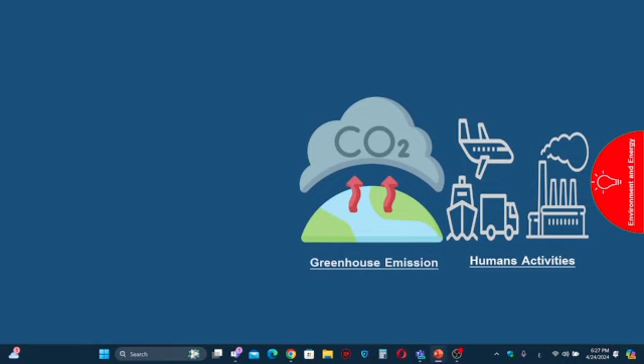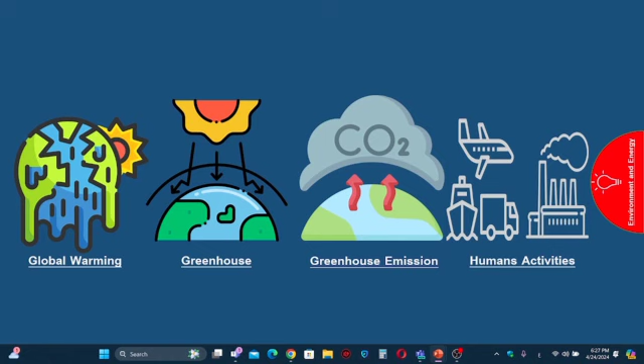This slide shows how the human pursuit of energy has a negative impact on the environment. As shown, human activities like transportation, industries, and power plants emit from their exhaust carbon dioxide, which is the dominant gas causing global warming. We have a group of gases causing global warming called greenhouse gases. The 2 most dominant of these gases are carbon dioxide, CO2, and methane. So, if we want to reduce the effect of global warming, we should control the amounts of emissions of carbon dioxide and methane.

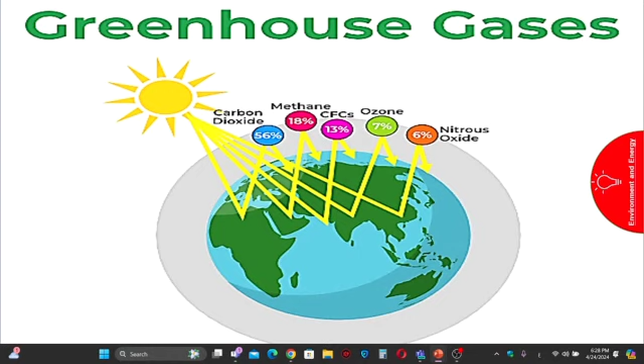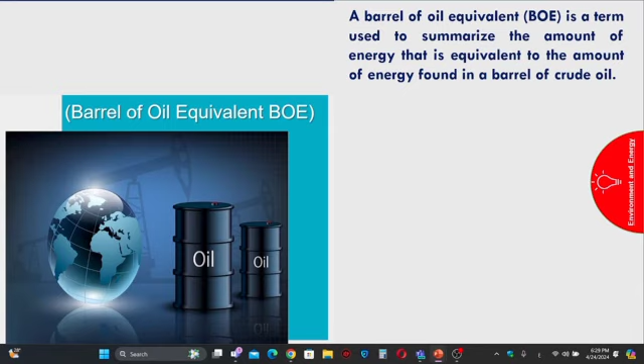The power system in general consists of 3 sectors: generation of power, transmission of power, and finally distribution of power. Fortunately, in the transmission and distribution sectors, there are no emissions. The problem is with the generation sector. This leads me to explain the term BOE. BOE is barrel of oil equivalent, a term used to summarize the amount of energy that is equivalent to the amount of energy found in a barrel of crude oil. It is an American unit of measurement, equal to 159.98 liters, or 42 gallons.

If I decide to burn 1 BOE, how much energy will I get? 1 BOE equals 1628.2 kilowatt hours of energy. Now, the amount of CO2 emissions per kilowatt hour. If I use coal, for 1 kilowatt hour I will get 1 kilogram of CO2. If I use oil, we will have 800 grams of CO2 per kilowatt hour. If I use natural gas, I will get 500 grams of CO2 emissions per kilowatt hour. And if I change my power plants from traditional power plants to combined cycle natural gas power plants, I will get 440 grams CO2 per kilowatt hour.

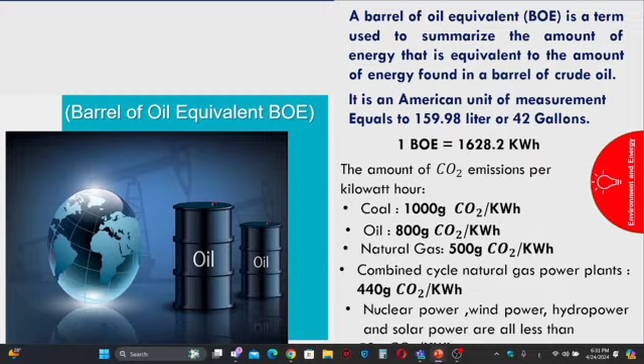Now, how to reach net zero emissions? The ways to reach net zero emissions are by applying the following. Number one, make our buildings sustainable by controlling the amount of light and air entering our buildings and the insulation of walls. This will impact the amount of energy we need during the different seasons of the year. It's like a chain. Low consumption of energy will mean less operation of power plants to generate the power. As a result, less emissions.

Number two, to reach the net zero emission, using thermal solar and photovoltaic panels. By using thermal solar heaters, we will save a huge amount of energy that we would consume by electrical heaters for heating the water.

As we mentioned above, the issue is like a chain. Low consumption of energy, less operation of power plants, as a result, less amount of emissions. Also, using the photovoltaic panels will supply the homes and buildings with electrical power. So this will affect the amount that we will consume from the national grid.

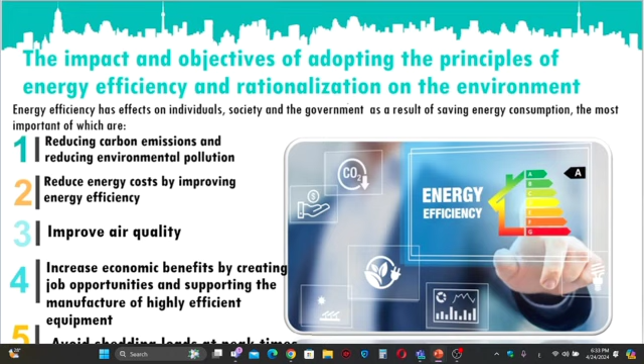Number two, reduce energy costs by improving energy efficiency. Number three, improve air quality. Number four, increase economic benefits by creating job opportunities and supporting the manufacture of highly efficient equipment. Number five, avoid shedding loads at peak times.

Also, to reach the net zero emission, I will use renewable sources like green hydrogen and micro hydro power. Hydrogen is the most abundant chemical structure in the universe, but unfortunately, it is not alone, but rather combined with other elements, like with oxygen in water, H2O, and with carbon in methane. For that, the process of getting hydrogen is complicated and expensive.

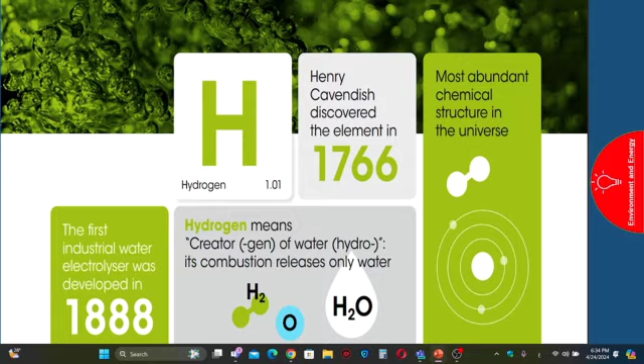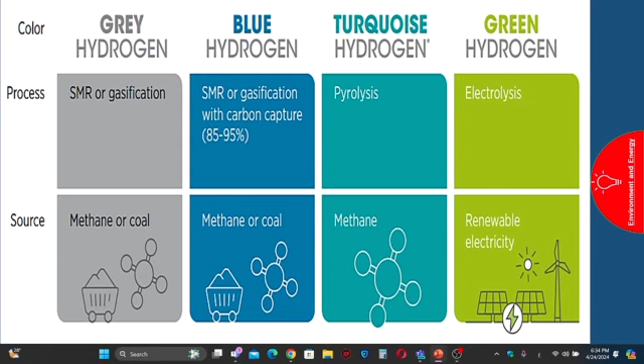Hydrogen is classified into several colors depending on the method of separation and the amount of emission during the separation. As you can see, we have gray hydrogen, blue hydrogen, turquoise hydrogen and green hydrogen.

The point is, when I try to separate the hydrogen from another element, I will get some emissions of CO2. So if these emissions escape to the atmosphere, I have gray. If I have carbon capture, it will be blue. And if I use pyrolysis and I have carbon in solid state, I will have turquoise. What is important for me is the green hydrogen.

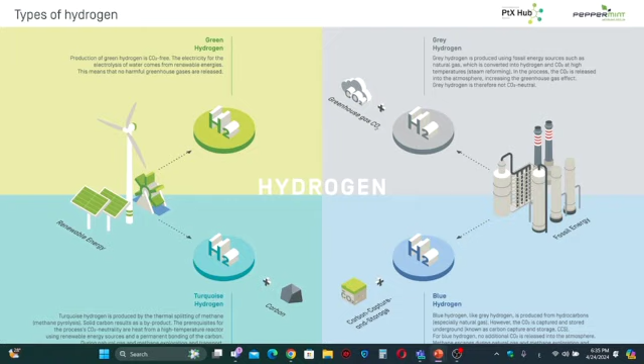Production of green hydrogen is CO2 free. There is no CO2 emission. The electricity for the electrolysis of water comes from renewable energies. This means no harmful greenhouse gases are released. For that, it's called green hydrogen.

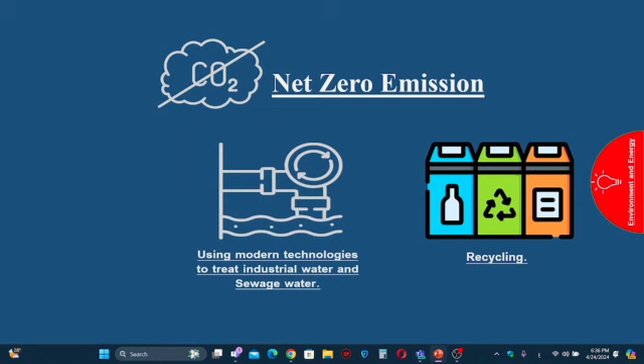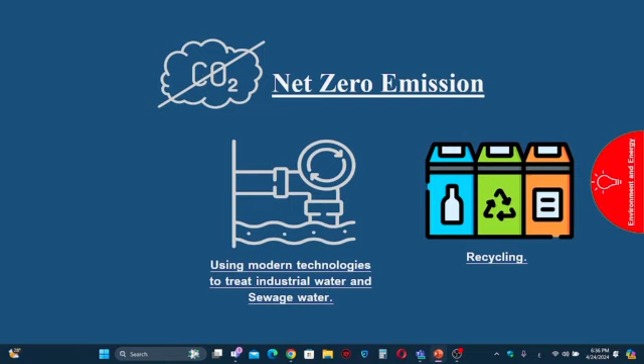Also, to reach the net zero emissions, we should apply recycling on our wastes. So we have a glass bin, organic bin, paper bin, etc. Also using modern technologies to treat industrial water and sewage water. Maybe someone will ask what is the relation between net zero emissions and treating industrial water and sewage water. Actually, it contains methane. So here we need to reduce the methane.

Also, to reach the net zero emission, and this is related to the Ministry of Electricity, we should transition the operation of power stations operating on fossil fuels like oil and coal to using gas, and also use technologies to improve combustion and reduce emissions, such as DLN incinerators. DLN means dry low NOx, or adding chemicals to fossil fuels and using gas disposal techniques. It has symbols SOx for sulfur, NOx for nitrogen, and COx for carbon.

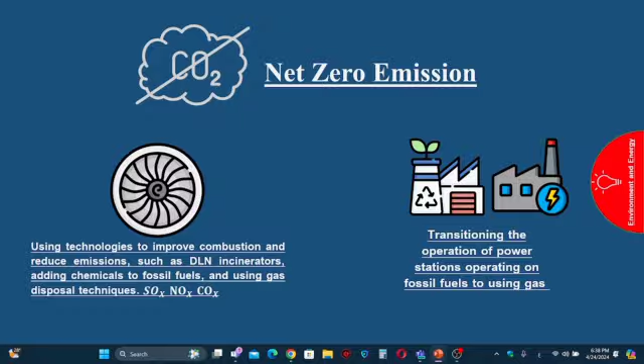After everything that has been shown, based on the emission numbers, it forces us as a Ministry of Electricity to get the energy from renewable sources and change from fossil sources to renewable sources. As known, sources differ from one country to another. For example, in a country like Iceland, there is an abundance of geothermal energy. As for our country, Iraq and Saudi Arabia enjoy the longest hours of solar radiation, reaching about 6.8 hours per day during the whole year.

This leads me to explain the solar system components, the factors that affect the efficiency of the system, and the methods to enhance the efficiency of the solar system. So any solar system consists of the following.

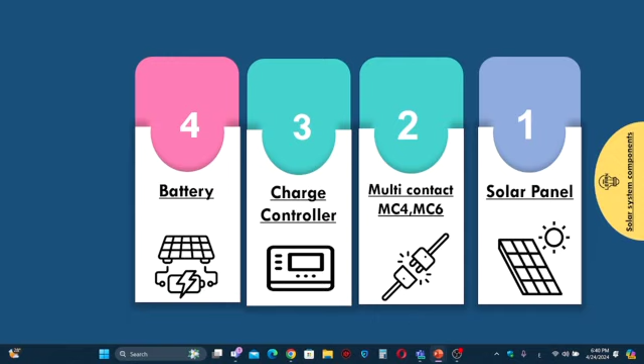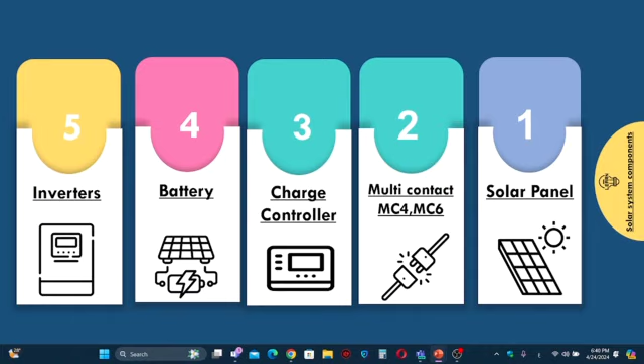Number one, solar panel. Number two, multi-contacts, MC4 or MC6. Number three, charge controller. Number four, batteries. And until this point, this system is a direct current system. Because our appliances are AC, I need the inverter to convert the power from DC to AC. And finally, I need to protect my system by using a protection device.

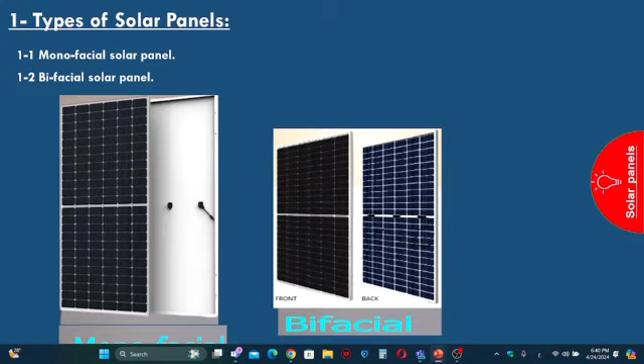Types of solar panels. We have monofacial solar panels and we have bifacial solar panels. The monofacial solar panel has cells on one side and the other side is a backsheet. The bifacial solar panel has cells on both sides.

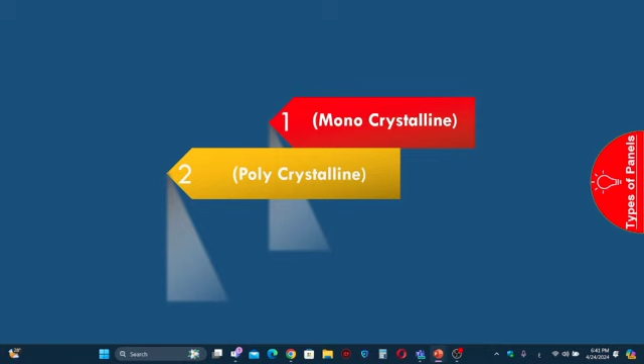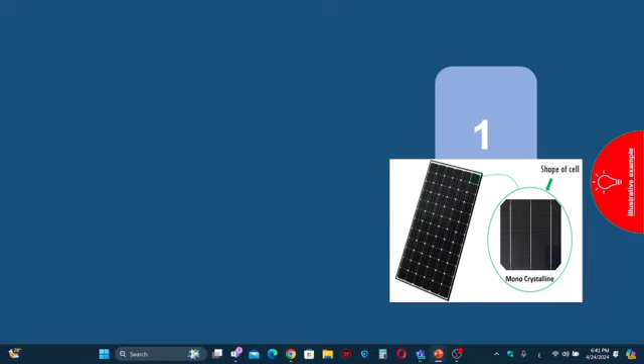The cells are made from crystal, and we have three types of these crystals. Number one, monocrystalline. Number two, polycrystalline. Number three, amorphous silicon cell, or it's called thin film. This is the shape of monocrystalline; it has like an octagon shape. This is the shape of polycrystalline; it's like a square or rectangle. And finally, this is the shape of the thin film or amorphous.

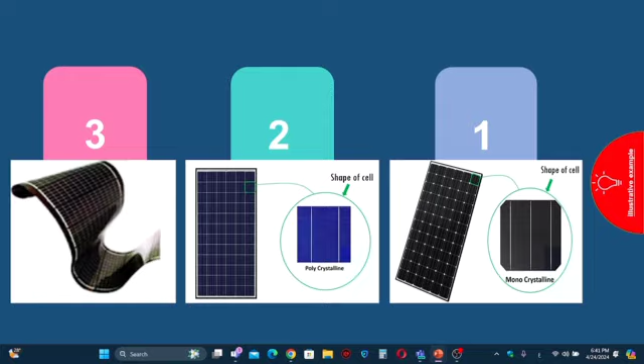Efficiency of solar panels. The engineers and technicians, or anyone interested in the subject of solar energy, must differentiate between two terms. The first term, nominal power of the solar panel. The second term, the efficiency of the solar panel. Because unfortunately there is a misunderstanding about the nominal power of the panel written on the back of the panel on the nameplate, and about the efficiency of the solar panel.

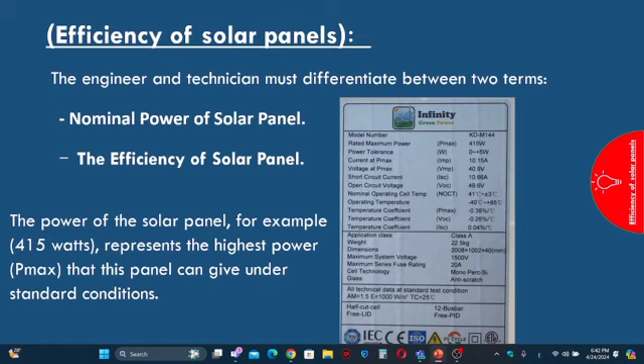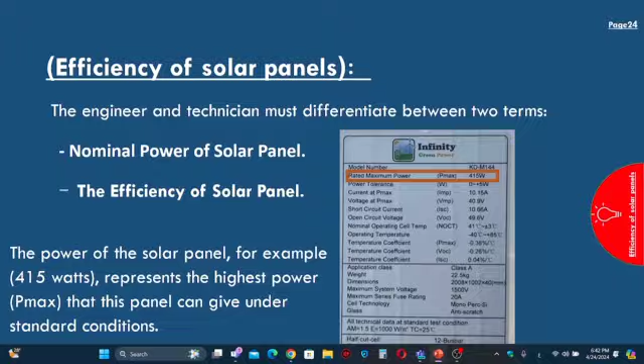If we have, for example, a solar panel with capacity 415 watts, this means this panel will give me 415 watts if it has standard conditions. So I will get 415 watts if I give the solar panel the standard conditions. Okay, what are these conditions? Standard conditions are factory test conditions, which are called standard test conditions, STC for short.

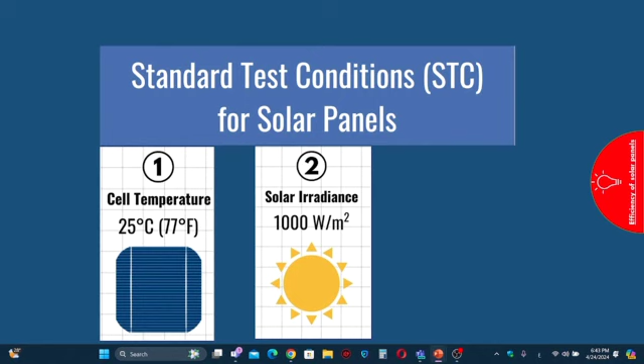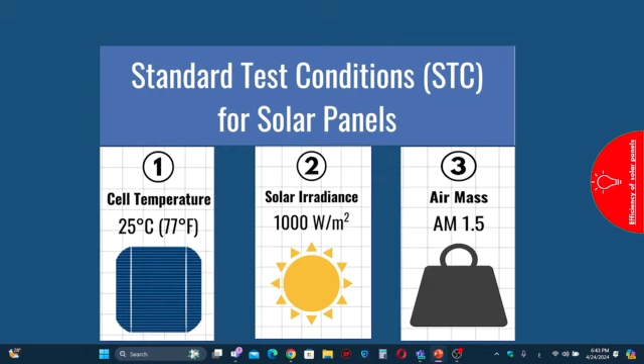The first condition, the temperature of the solar cell, which is 25 degrees Celsius, or the equivalent of 77 Fahrenheit. The second condition, a solar irradiance of 1000 watts per meter square. The third condition is the air mass 1.5. If these three conditions are met, the panel will give me the power written on it, which in our example is 415 watts.

Now, calculating the efficiency of solar panels. Solar panels are the same as any other system in life. Any system efficiency is an expression of the power coming out, P out, of the system over the power coming in, P in. The power coming out of the panel is the electrical power, P max, while the power coming in is the solar irradiance multiplied by the area of the solar panel.

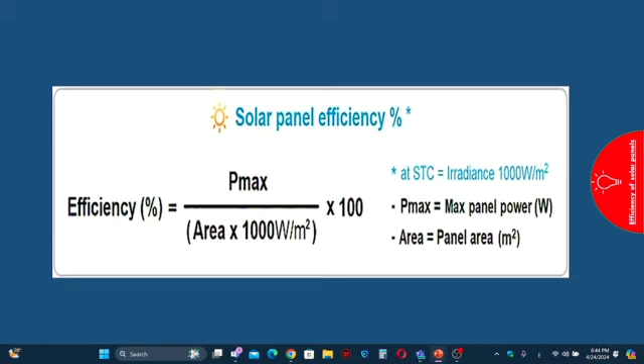This is because of a technology called PERC, P-E-R-C, passivated emitter rear contact, or P-type. This technology has solved many problems in raising the efficiency of solar cells and has prevailed in the solar energy sector to this day.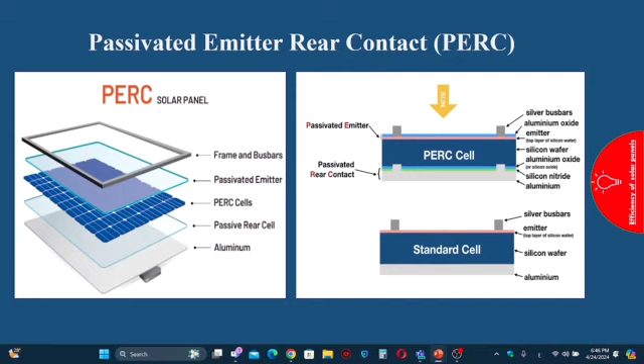The figure in front of us shows what the cells are composed of. As you can see on the right, the PERC cell is the same as the standard cell, but we added 2 layers, the passivated emitter in the front and the passivated rear contact in the back. This acts like a mirror to reflect the escaped electrons, and this will reflect as a gain of power. For that we have high efficiency.

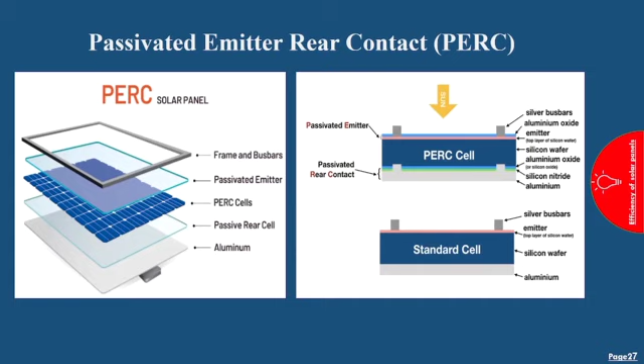The second one, an alternative to the PERC technology, is the TOPCon or N-type technology. This is because PERC or P-type technology has approached the end of its theoretical efficiency, as it cannot exceed 24.5 in its best cases, and as a result it has stopped. As for the efficiency of TOPCon N-type, according to research, it reached 28.7, and in practical life we have not reached this efficiency yet.

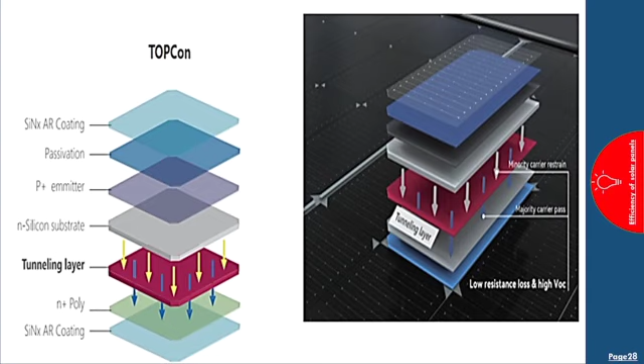Therefore, and because of the high theoretical efficiency of this type, N-type TOPCon, there is a great possibility of paying attention to these cells and increasing their efficiency in the coming years, as they have given successful laboratory results in developing the lifespan of the cells and their suitability for working at high temperatures like our country, Iraq, due to the improvement of the temperature coefficient for N-type panels due to TOPCon technology.

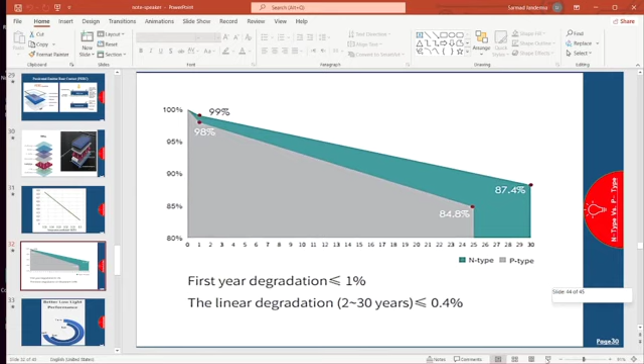If we look at the figure, which is taken from the datasheet of Jinko Solar, a Chinese company specialized in the production of solar panels, we note that there is an increase in production represented by the green color, as well as an increase in the warranty from 25 years to 30 years over traditional panels.

Companies usually give a 25-year guarantee on the production of electrical energy, as shown in gray, so that these panels produce an equivalent of 84.8% after 25 years, while N-type panels have a 30-year guarantee, and after 30 years they produce the equivalent of 87.4% of their nominal capacity. In conclusion, there is a significant increase in the production of these cells and in their lifespan, and this is great economic value, especially in large scale projects.

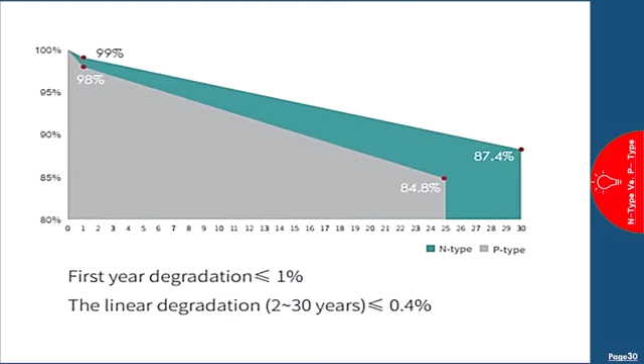As for two-sided panels, I mean bifacial, there is an increase in productivity of 2% for N-type bifacial over two-sided P-type panels. This increase is the result of the increase of the bifacial factor from 70% for P-type to 85% for N-type. Bifacial factor means the efficiency of the backside compared to the efficiency of the front side of the panel at the same rate of solar radiation.

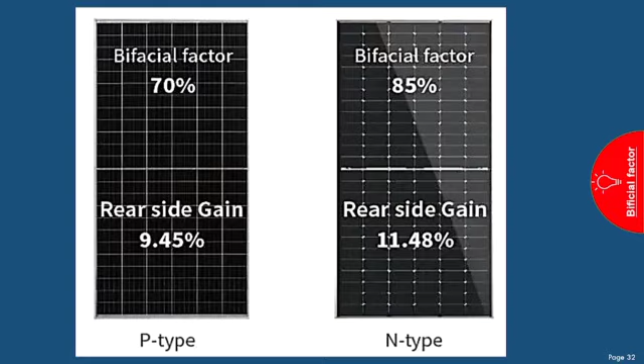Okay, we have the manager, Dr. Maher. Sorry, Dr. Maher, if you have anything to say, any comments? No, there are no comments. I'll ask at the end. Sorry. Okay, thank you very much. So I will go ahead. Yes, please.

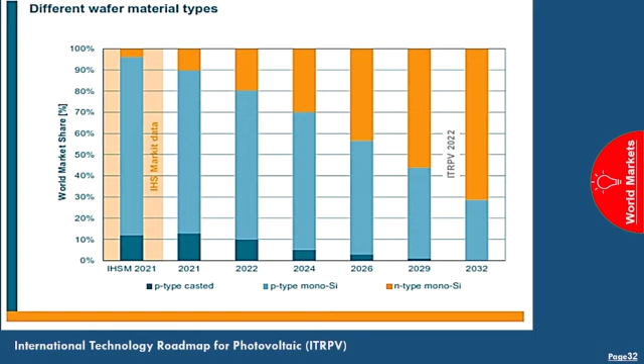Regarding solar cell manufacturing techniques, the figure gives us a complete picture of cell manufacturing techniques, how they began and where they are headed in the future. About 50 years ago, companies began producing P-type solar cells, and they are still continuing. These panels still control the biggest share of the market. About 10 years ago, companies began to move into N-type. These panels began to occupy approximately 20% of the market share in 2022.

There are several technologies for manufacturing N-type panels. The first generation technology is called PERT.

This technology is quite similar to PERC technology, which is used to manufacture P-type panels. As for second generation technology, it is TOPCon and heterojunction, HIT. TOPCon technology is considered the cheapest and best when compared to the complex and expensive manufacturing process of HIT technology.

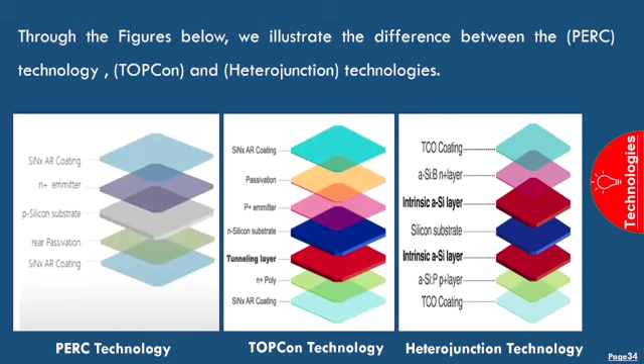In the TOPCon technology, we have the N substrate thicker than the P emitter, and also an additional layer called the tunneling layer. It behaves like a tunnel to move or drive the electrons to gain more power. And finally, heterojunction technology is more complicated than TOPCon and PERC. It has intrinsic silicon layers added to the layers.

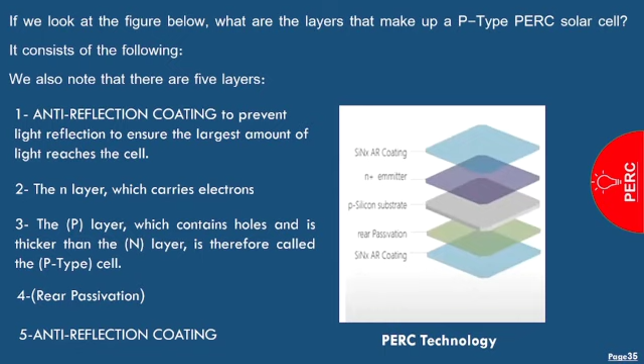Here, one by one, we have coating of silicon, N emitter, and silicon substrate, rear contact passivation, and also coating. As we say, because the P layer contains holes and is thicker than the N layer, it's called P-type. And in the TOPCon technology, we also have the coating, passivation, P emitter, which is thin, and N silicon substrate, which is thicker. That's why it's called N-type.

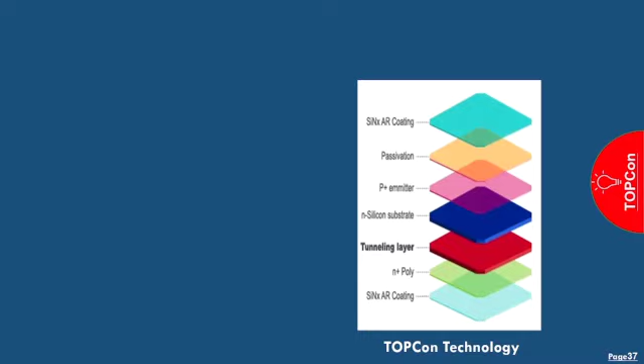And the tunneling layer is a layer of inert silicon oxide. Its function is to prevent recombination. This process, recombination, produces heat. Heat is the enemy of the efficiency of solar panels. So if you want to improve the efficiency of the solar panels, you need to decrease the heat. That's why the tunneling layer here prevents recombination, meaning it decreases the heat generated by the electrons. And also the N-poly layers and silicon coating.

Finally, the heterojunction. This technology combines the benefits of two different types of solar cells into one high-power hybrid solar cell: crystalline silicon and amorphous silicon film. They are made up of thin layers of N-type and P-type silicon and a thin layer of amorphous silicon in between, acting as an intrinsic layer. This results in higher conversion efficiency and lower recombination rates.

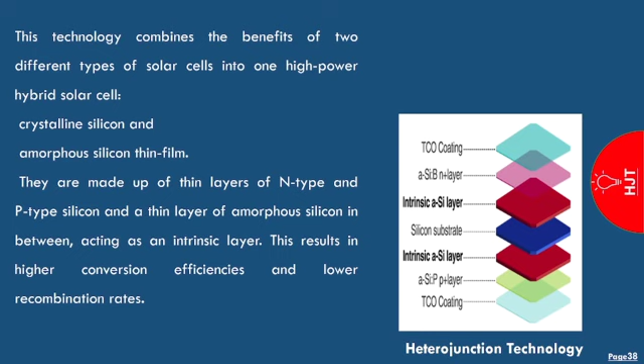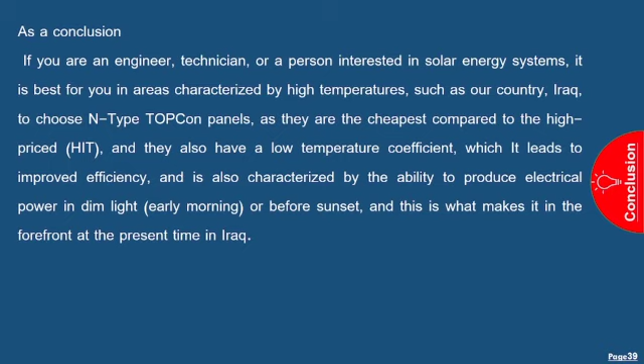As a conclusion, if you are an engineer, technician, or a person interested in solar energy systems, it is best for you in areas characterized by high temperatures, like our country, Iraq, to choose N-type TOPCon panels, as they are cheaper compared to the high-priced heterojunction, and they also have a low temperature coefficient, which leads to improved efficiency, and they are also able to produce electrical power in dim light, I mean early morning or before sunset. And this is what puts them at the forefront at the present time in Iraq.

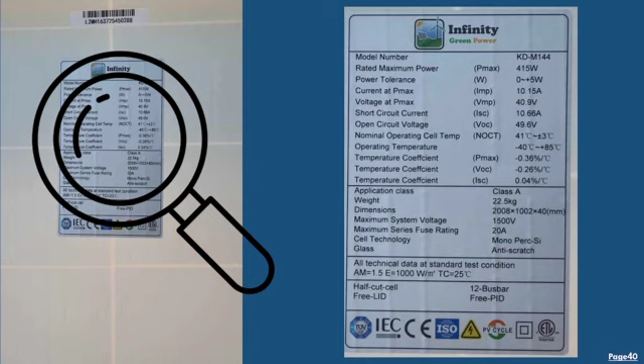Here I have the actual data or nameplate for the panel. As you can see, we have the rated maximum power 415 watts, power tolerance from 0 to plus 5 watts, maximum current 10.15, open circuit voltage 49.6, short circuit current 10.66, etc. Here I want to mention the cell technology. As you can see, the cell technology is mono PERC Si. It means monocrystalline silicon with PERC technology.